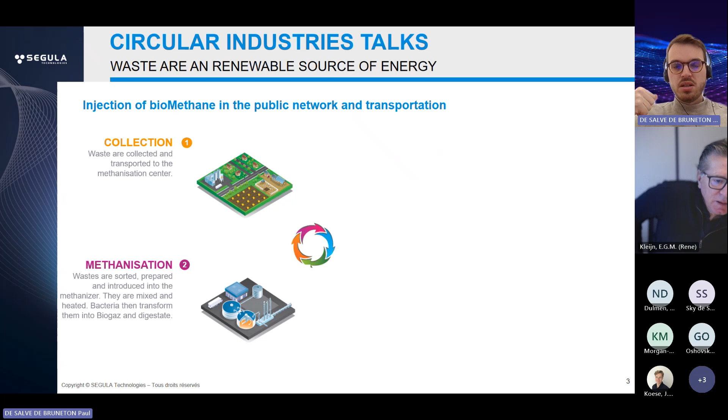So at first, you need to collect this waste from multiple subjects. I will talk about it in a few minutes. Then you go through the process of what we call methanization, meaning you need to sort your material, prepare it, and then put it in some big containers with a soft top. You put some bacteria inside of it, and like a human body which digests materials, with the heat and the help of bacteria, all this waste is going to be transformed into biogas, which evaporates and goes to the top of the container. What is left is what we call digestate.

So after that, you will need to inject the biogas that has been extracted from the methanization process. In France, we have a company called GRDF, which handles more than 90% of the entire network in France, and more than 95% of methanizers in France. So for each methanizer they have a control station, a control center, and they handle the increase of pressure because methane has to be injected at around 10 bars into the network.

What they do is control this quality, and they put some smell into the gas, which is very important in terms of security, because then you can smell if there is a leak, which is very important. They also control the pressure to make sure there is no overpressure or leak of pressure. The producer will be paid depending on how much volume of metric cube of gas it will inject into the system.

And the last part of the cycle is to reuse and use this gas. As I told you, in the second step of this cycle, we have two products of the methanization: one is biogas, and one is digestate. The digestate can be used as a natural fertilizer for crops. It's very important - it keeps its property in terms of organic matter, but the smell is gone, which is very interesting, and it's a very powerful fertilizer.

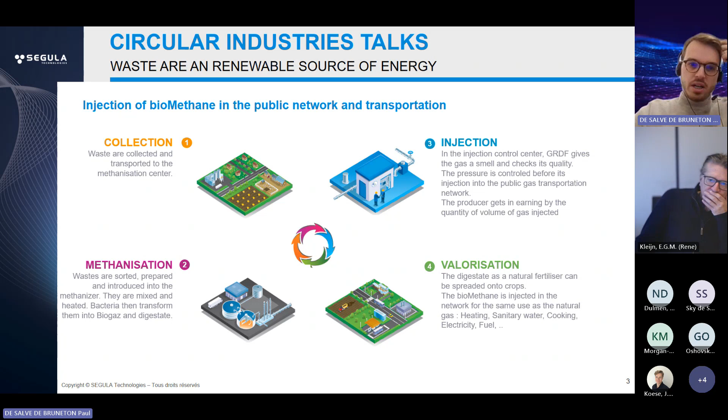But to know if the gas you are buying comes from a biosource, GRDF gives some certificates to say, okay, we are selling you about 10%, 20% of biogas. So what is interesting is that this whole process has almost a neutral carbon footprint.

So as I was talking earlier, all organic wastes - it can be manure, it can be food waste, it can be green wastes from cities that have lands where they want to cut grass, for example - you can collect everything. And there is also something interesting: between different crops, you have to put some temporary crops to help put nutrients into the soil.

Most of the time, what the agriculture guys do is just destroy these crops so that the energy goes into the ground. But what's interesting is that instead of destroying it, we just mulch it and use it in the methanizer. So there are a few less nutrients for the soil, but it will be put afterwards into the digestate. And so all this is collected.

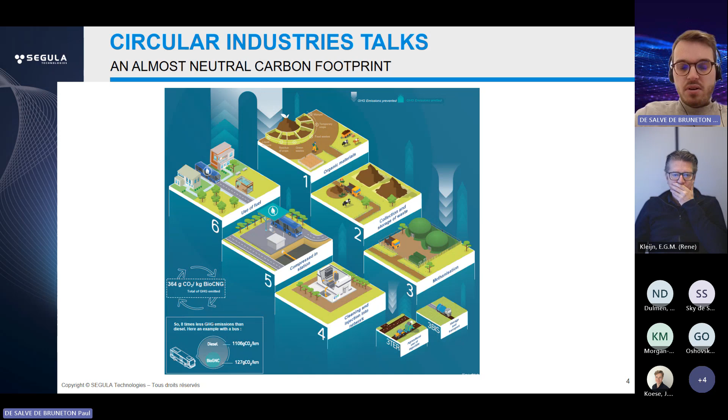So now let's talk about how to use it in our product, or mostly in boats.

What we have developed and what we think should be mostly used is an electrical hybrid system, where you handle all the propulsion generation with an electrical engine, and you can change your energy vector - either it's bio-CNG like in our case, or you could put in HVO, renewable vegetable oil, or you can use H2, or you can use methanol anyway.

That's really interesting because you don't change the electrical system with the hybrid. So we are talking mostly about serial hybrid systems, not parallel systems, which is a little bit different.

But in serial hybrid, you have a huge amount of advantages that are really interesting, especially in the case of the naval industry and obviously the inland industry.

What's interesting is that you can choose the amount of generators using the energy vector. For example, because such markets are quite new, if the engines are not available today, you can use smaller engines and put more of them. There's no issue with that, and you can also spread the loads in your boats instead of putting it all in the same place, so you can better rearrange your boats.

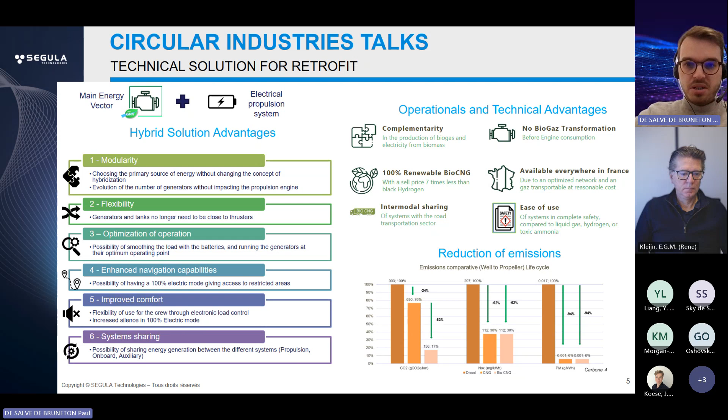So now let's talk about an actual project to show you how it can be done, using this kind of system in inland navigation. As you can see on the screen, it's an inland cargo vessel dedicated to sailing in France, but also Belgium, Netherlands, and pretty much all channels in Europe. For some of you who may be aware, it's what we call the Campinois size.

It's an old boat - most of the inland fleet is old. So this refit solution is also very interesting because we are reusing actual boats and just giving them new youth. This boat was built in the 70s, so it's very old, and it now has 3 engines: one main, one for the bow thruster, and one for emergency.

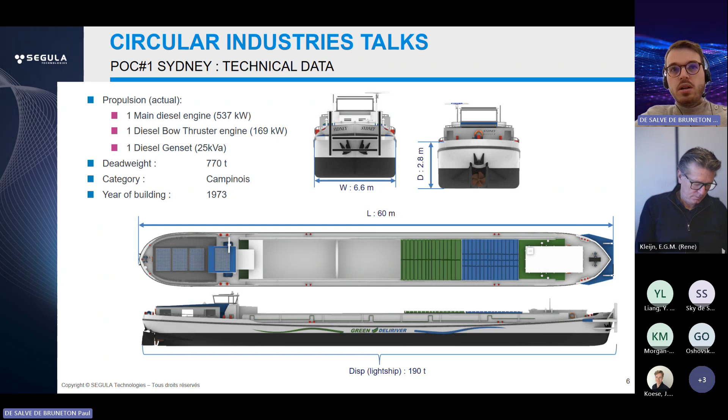For this project, we've developed a new concept. First you will have the gas generator that will produce energy that can be used into the main propulsion engine and the bow thruster engine. We then had to rearrange the boat to make room for the storage system, which in this case is compressed gas with a 6 meter wide container. A dedicated room has been constructed for batteries, and a new system has been made for the electrical engine.

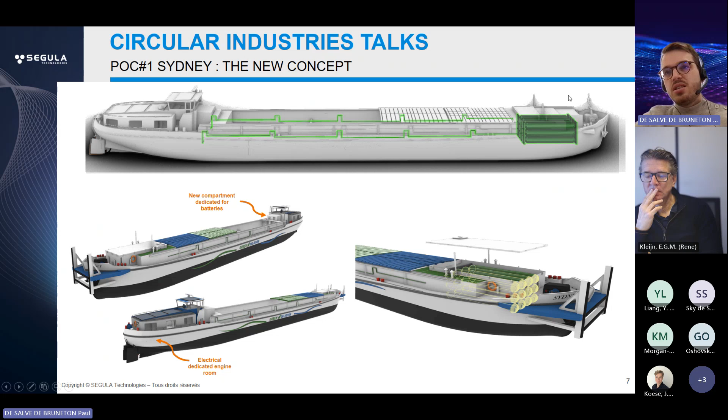In this case, all the storage of the CNG is done at the forward part of the vessel. This is where we have space, but it's also where all the hazardous areas are located, because you will have masts that can, in case of emergency, evacuate some gas. So all the ATEX areas, for those who know this term, are located in the front, and the gas is transported via pipeline at mid pressure.

It's about 50 bars of pressure to the safe area at the back, where it's all watertight and gas tight until the injector of the engine. That's why you need some maintenance to do it, and you have also a new dedicated CNG room to make sure different uses have different locations.

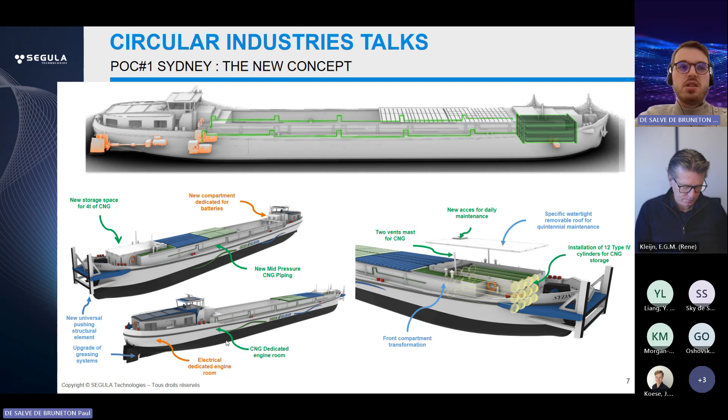Also interesting in terms of improvement of the boat, you can take into account updates to make it more useful for your economy. In this case, you can make some updates on the boats. So let's talk in more detail about how it can be done.

On the bow, you will have your high pressure storage system, at 250 bars. That's because the public network is about 10 bars, so you will need to compress this gas when you are doing the bunkering at the station.

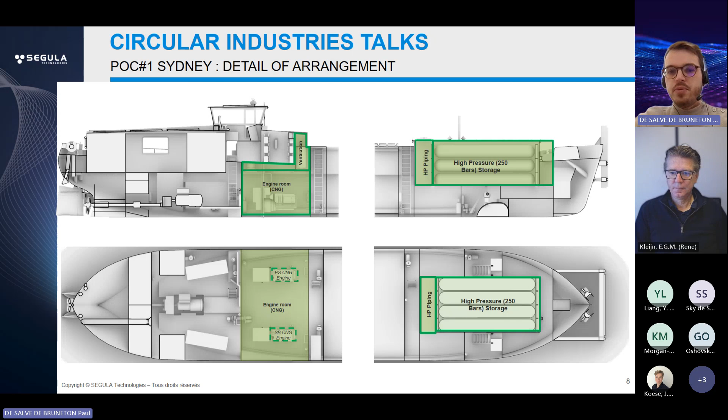You can use different systems to store the gas. In our case, these are single 6 meter long Type 4 pressure vessels, but you can also use shorter containers. It depends basically on the rules you want to follow.

Basically, you have two types of rules: one for road vehicles, what we call R110, and the other for equipment that is transporting pressurized gas. We use the second one, which is why we have this long system that can be used for transportation on the road.

You have a dedicated high pressure piping system that decreases the pressure and handles the fact that with this decrease of pressure you may have a decrease of temperature, which can freeze the system, so you need to manage this freezing moment.

All this gas is then transferred to the back of the boat to a dedicated CNG room, segregated from other parts. As you can see, there are two engines, so we've made sure there are two lines providing gas to these engines for redundancy and security, with ventilation above it.

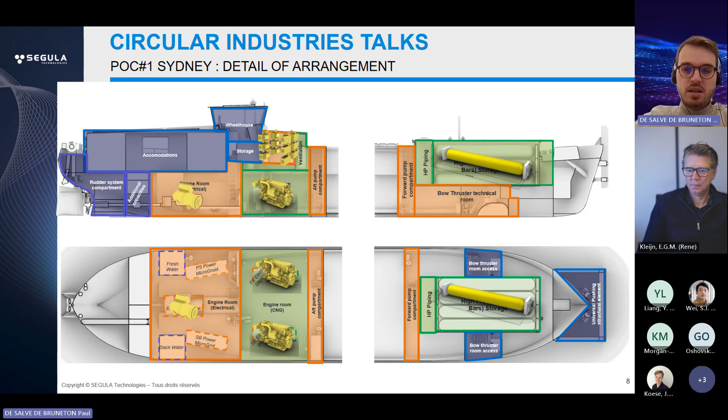So that's what we have put in front of these boats. So I will conclude this talk with a few projections into the business, because as you can see, we have talked about the powerful progress that we can make with this sustainable fuel and how we can implement this into inland waterways. So this refitting of boats

is a major actor in the modernization of the fleets, because most of the fleet is more than 40 to 50 years old, whereas cars have evolved a lot. So we really need to modernize it, and this modernization is part of a bigger picture to redynamize inland transportation, to participate in the greening of river transport, because for the same amount of weight that you transfer, inland navigation is way cleaner than road transportation.

So yes, obviously you will have to rethink the time and the logistics, but if you use greener boats, which are greener than trucks even if they are old, then you will really have logistics that become a lot greener than today. And this will also help develop what we call multimodal transport, with hubs where you share loads. For example, you will unload your boat onto bikes, or you will unload your train into boats.

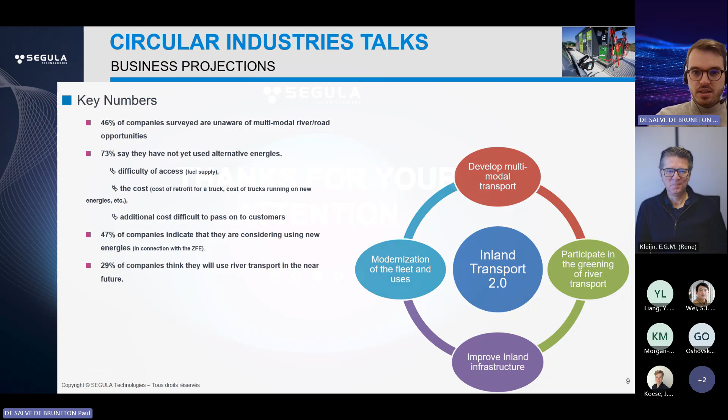There might be some virtual hands, but thanks for this nice introduction to shipping and how alternative fuels can be used in shipping. Maybe I can kick it off with a first question. I've been looking into inland shipping myself with a student at a certain moment, and that project was aimed at using hydrogen as a fuel for the same types of barges that you were talking about. Can you say something about what you think are the advantages or disadvantages of these two systems compared to each other?

So to answer this, you have to decide which picture you want to look at. Do you want to look at it in terms of technical advantage or in terms of emissions? And if it's in terms of emissions, do you want to look from the tank to the propeller, or from the well to the propeller? Obviously, if you look at emissions, I would say that hydrogen is not a short-term solution, because you need energy to produce it from water, and you also need water that is not salty. But in terms of combustion, it's very interesting because you will not emit any greenhouse gases. So it's really interesting when you look from tank